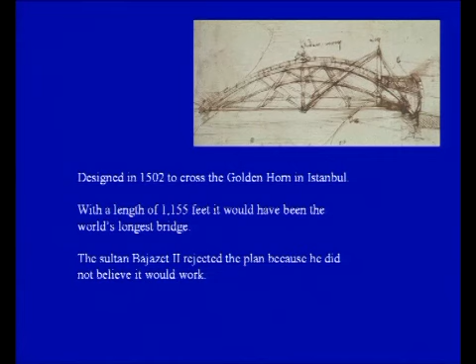Anyway, since I'm coming back from Italy, I thought this is the first lecture in the morning, and I thought that probably it's nice just to wake up in a different way. And my talk is about modeling.

Being about modeling, we do think that modeling is something we do just nowadays, but actually people were doing modeling long time ago too, and of course, being Italian, I'm very fond of Leonardo. That's the model of a bridge that Leonardo tried to convince the Sultan to build on the Golden Horn in Istanbul.

However, there is an analogy here. People never believe in models. The Sultan never believed in that model. The bridge was never actually built.

However, only recently, an architect in Norway saw the model of Leonardo and tried to build it. This is what the bridge looks like today. It works perfectly, without any experimental validation.

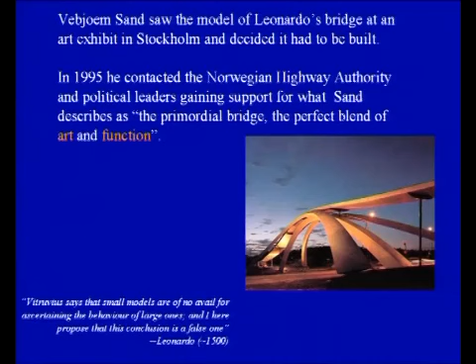So I think there is good hope that the models we do can probably work. Leonardo, I think, realized that small models sometimes can work, and they are really the ones we should look at before we actually model the big system.

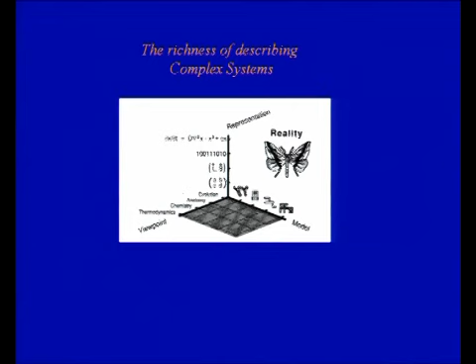This is just a little bit of introduction to say that what I want to do is describe a very complex system, and what I'm trying to do is represent it through a model. There are different viewpoints, and today I'm going to show you just one of the viewpoints, the way I do some kind of modeling. It's not unique, not the only way to solve the problem, but it's a way to do some investigations.

Now, to give you a little bit of background and go finally into the topic of the talk, granular materials. Well, granular materials, we all know that might behave in very different ways, and it depends really on what kind of flow they undergo. They can undergo slow flow, and the particles in this kind of regime are really undergoing non-impulsive and finite contact interactions. This is the regime where usually we use what is called frictional laws, and we take these laws usually from Coulomb.

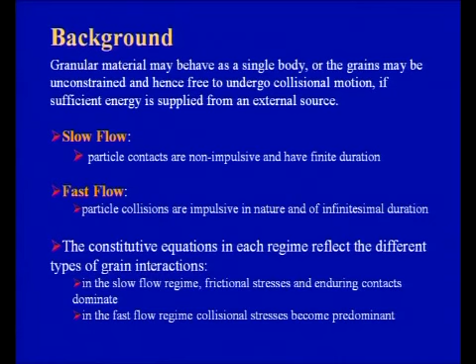Fast flow is the other extreme, where the particles really move very fast. They are very agitated, they can collide with each other, they can move around freely. Usually we assume that the contact between particles is of infinitesimal duration. When we try to model the two regimes, we use constitutive equations, and the constitutive equations have to take into account what really is the kind of interactions between particles.

As I said, in the slow regime, we have frictional stresses. Usually, in the fast flow regime, we have kinetic and collisional stresses.

The challenge here is really to develop the methodology and approach, and there is not a unique way of doing that, but we use the volume average continuity and momentum equations, also called the two fluid models.

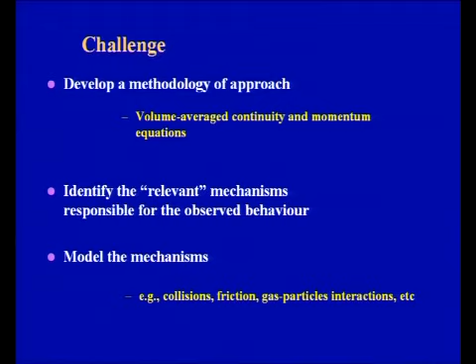We have to identify what are the relevant mechanisms which are responsible for the behavior, and we have to model the mechanisms, including collisions, frictions, gas-particle interactions, and sometimes cohesion, and so on. We have spent quite a lot of time identifying what are the real mechanisms we should consider.

I think there is still a long way to go, because there are still many investigations that need to be done, probably at the particle level, which can give us a much better understanding of what really is happening among particles.

Telling you just a little bit the way we solve the problem, we do assume what is called continuum modeling. These are the particles. I don't think I need to go into much detail, because my audience today is of experts, and that is really very nice.

But anyway, just briefly to review the way we do the modeling: these are the particles which are in a duct, for instance in a tube or whatever, and the particles are considered to be like a collection. All the collection of particles are considered to be a continuum.

This is why we can actually write momentum balance for what we call the particulate phase. And the two phases, the gas and the solid phase, are considered as two interpenetrating continua.

I think that overall, this is the important step, and this is where we have concentrated a lot in the last years, writing down the constitutive equations.

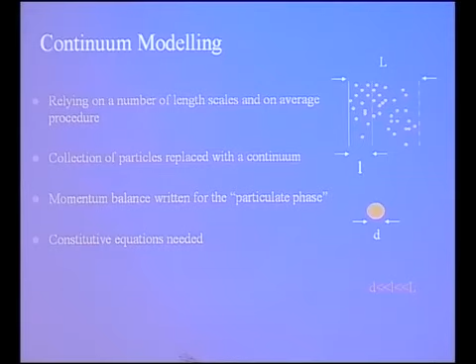The other thing I forgot to say is that in order for this kind of modeling to be valid, there are many questions, because there are people who don't believe in this kind of modeling. I think the most important thing is that we have to make sure we are dealing with a system such that all the length scales are taken into the right consideration.

In other words, we make averages on a volume, a control volume, which does contain enough particles. Because if we go to the scale of the particle length, we lose the possibility to make this kind of averages.

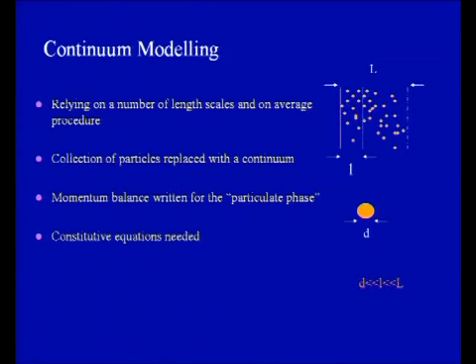One of the major problems is just to write the boundary conditions, because saying 'at the wall' doesn't mean anything. You really need to consider a zone which is very close to the wall, but still contains a significant number of particles.

I'm not going to go into much detail through the equations at this level, because I would like to concentrate on one of the issues we encounter during this kind of work. What I've done so far is present you the two limits, the slow and the very fast flow, and now I'm going to present the equations.

These are limits, but there are situations in between that, up to some time ago, we weren't able to model. We hope we have tried to model it in a more realistic way, but probably this is not over yet.

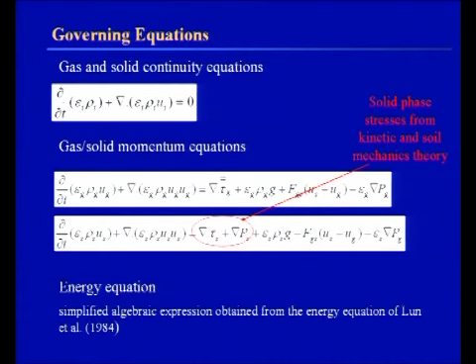We have to write governing equations, and this is the continuity equation, written for the gas and the solid. The index here just indicates the two phases. Epsilon is the solid volume fraction.

Density, velocity, and here the gas and momentum equations, the gas-solid momentum equations. Again, these are for the gas and this is for the solid. As you can see, all very well known terms.

You can see the stress here for the gas, which doesn't usually give any problem, and you can see the stress here for the solid. The big problems arise when you try to write constitutive equations to close the balance equations for the stress here. Again, this is the drag force.

Everything probably can be written in a sort of straightforward way. However, when we try to express these two terms in terms of the characteristic of the system and what the behavior of the system is, the real problems start to arise.

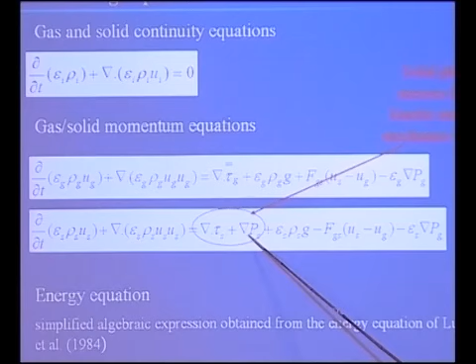I put this here, I don't spend much time on the details of the equations. I didn't write down the energy equation, which has to be supplied to these equations, to the momentum and continuity equations, only because when we try to express these two terms here, and some other bulk properties of the gas and the solid, we do need to introduce what we call granular temperature.

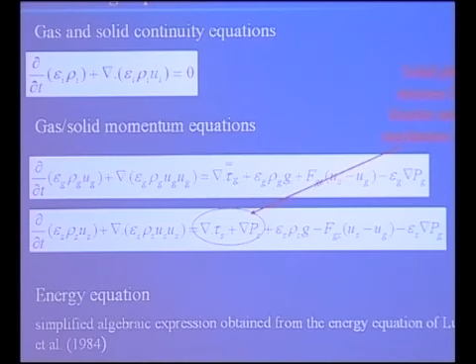I'm careful now, I don't call it pseudo temperature anymore because people don't like it so much. But anyway, granular temperature, which is nothing else than a measure of the fluctuation velocity of particles.

Now, as we said, there are situations where particles can be very close to each other, the flow can be very dense, and therefore we need to take into account the fact that there are some frictional stresses, which are the dominant ones. There are situations where the flow is very dilute, so probably the kinetic and collisional models can be okay.

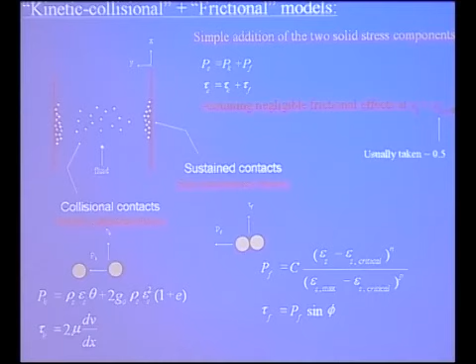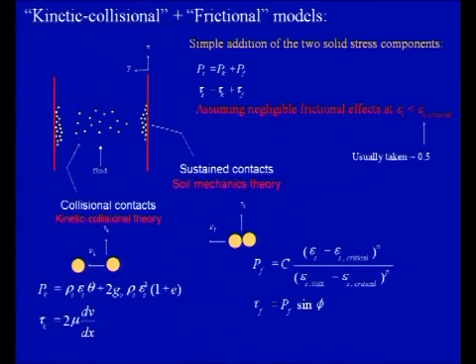However, you do realize, and this is the first problem that we started to have a really long time ago, these kinetic collisional plus frictional models, which is called also the additive model, dates back to a very long time ago. My PhD thesis last century was on this one. Yes, it was on this kind of approach, and that's exactly what I did.

I just put the two contributions together in a very simple way, actually.

And what we were saying at that time was, well, if there will be a critical value of the solid volume fraction, if that critical value is exceeded, therefore you do switch to the other regime. So it was not really any kind of modeling of the intermediate flow, you just say this is the flag. Under this value, you have kinetic collisional flow. When you reach this value, then you switch to the frictional flow.

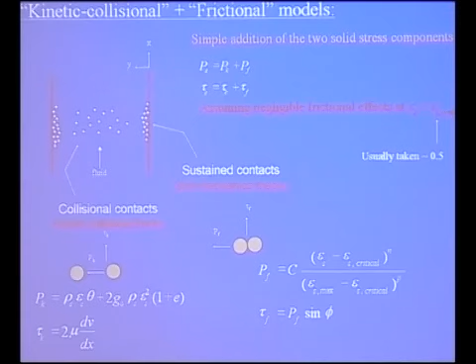And here, of course, this theory was developed in 1984 I think, and this is really from the soil mechanics theories, and these are the classic equations. There are many derivations, but usually we refer to Lun and co-workers in 1984 I think.

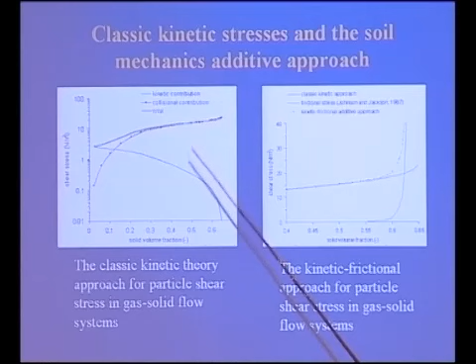Now, as I said, collisional, as the word says, is just the stress which arises from the collisions between particles, binary collisions between couples of particles. The kinetic stress is the one which arises because particles are moving around, bringing their own kinetic energy with them. So it doesn't involve directly the collision.

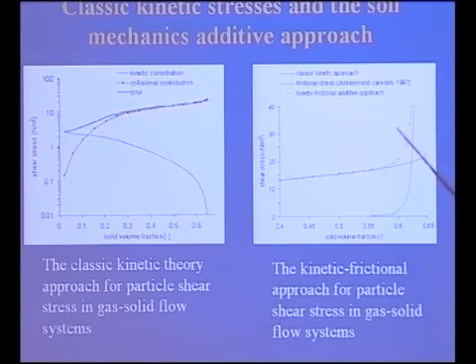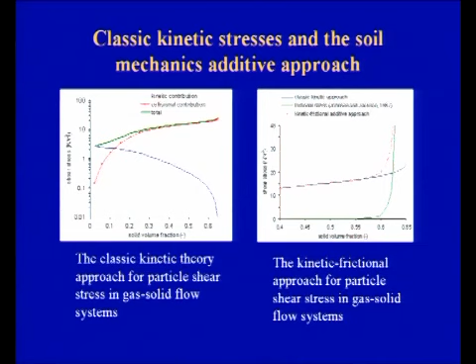Here we have plotted the shear stress versus the solid volume fraction. When we put them together, this is the kinetic frictional additive approach. This is just the frictional, and this is the kinetic. As you can see, the additive approach takes a switch at about, well, it depends. Some authors take 0.5, some 0.55, 0.59, and so on. So it's really in this area that we have a sort of flag where we just tell the program, well, go to the other way of calculating the stresses.

Intermediate regimes. Now, we looked at that data, we did a number of calculations. This is not just the thing that we calculated, of course we calculated the velocities, we did the flow maps and everything. However, I think there was a clear indication that something was going on between the two flows.

And actually, it's the reason why we started to realize that it was not really good for the kind of flow that I will speak about today, which is really the horizontal flow. But it was, and my co-author is in the audience, this work is really very much the work that Yassir over there did when he was at Heriot-Watt.

We started to investigate fluidized beds, and we had some strange situations around the bubbles. We started to try to understand what was going on. And there was this region where the flow is not very dilute, the particles are not very dilute and not so dense. And this is why we started to think, well, probably there is an intermediate regime there.

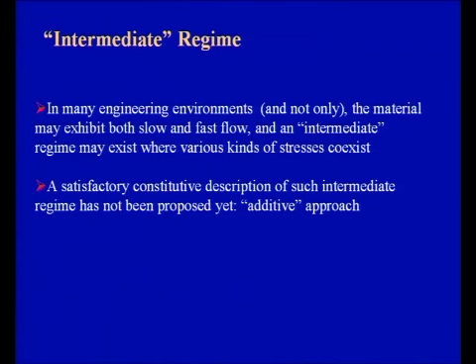I remember we went to an IFPRI meeting in Germany, and we were discussing - Ricky was there and Roger was there - this intermediate regime. We're aware that the slow and fast regimes are very ideal situations, which we've idealized in our mind. But of course something exists in between. The additive approach isn't really modeling what is in between the two regimes - it's a way of cheating, I suppose.

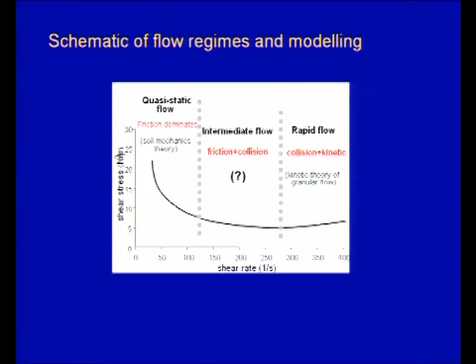This diagram, redone here, summarizes a little bit what I was trying to say. As you can see, there is quite a big zone here where we really should consider the intermediate flow, and we don't know very well how to model it.

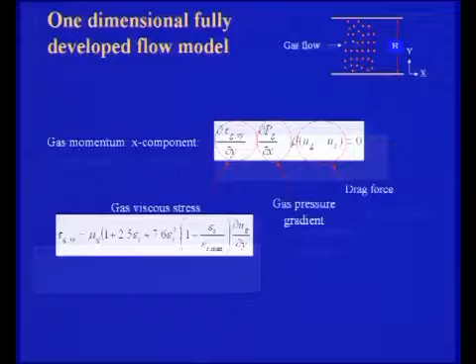In order to address the intermediate flow, we started to think of doing our calculations on a one-dimensional, fully developed flow model in the horizontal duct. The reason we decided on the horizontal one is that it's a very nice way of investigating the intermediate regime, because close to this wall here, you have very dense flow, at the top you have very dilute flow, and there are all situations in between that you can think, well, this is probably intermediate flow.

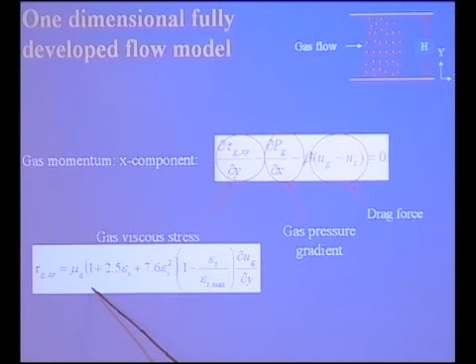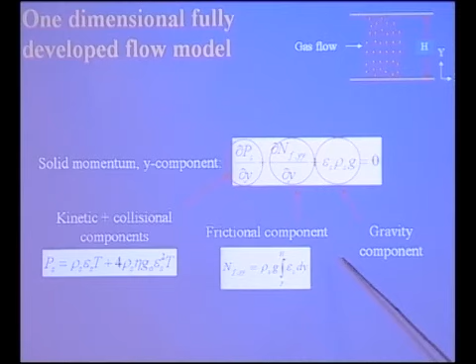So again, we wrote the usual equations for the two phases. This is the gas - we use the expression for the gas, which is modified for the presence of particles there. This is the y component of the solid momentum for the gas, with two contributions now: kinetic collisions and the frictional, and this is the gravity.

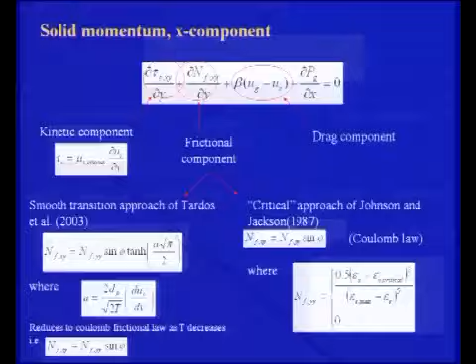Again, it seems like written in this way - still, we have the kinetic and the collisional ones in this additive way. Solid x momentum - now here it comes, it's a very busy slide. Let's try to see what I'm trying to say here. This is the kinetic component of the solid momentum, this is the frictional component.

Now here there are different kinds of approaches. There's the critical approach, originally done by Johnson and Jackson, and as I said, I use exactly the same methodology in this kind of problems - this is really the Coulomb law.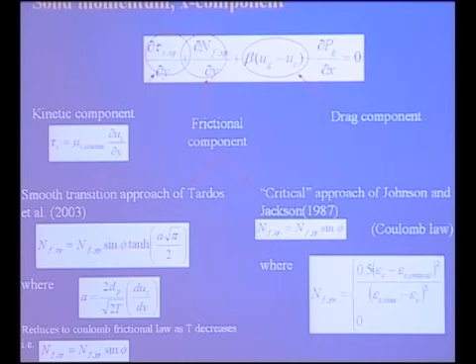Tardos in 2003 developed a new way of approaching this frictional component, and as you can see here, there is a new way of relating the frictional stress to the pseudo temperature. The good thing about this methodology is that now you have A, which can change when the pseudo temperature or granular temperature changes, and this equation only in the limit when this goes to infinity recovers the Coulomb law - you recover the right limit.

So just keep in mind that expression for the time being. And then the kinetic energy balance - as I said, we need to write this because we have that T that we need to express. We have the additional unknown T, so this is why we need an additional equation.

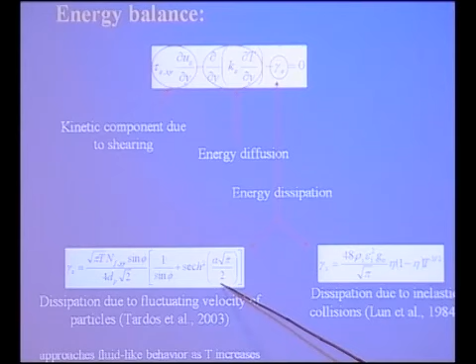There are again two ways of writing the energy dissipation now. This is the original one, which comes from the kinetic collisional model. This is the one which comes when you use the Tardos approach, and again you can see there is a contribution which is more or less important depending on the values of A. This energy dissipation, I should say, is a way of saying that particle-particle interactions are not perfectly elastic - in other words, there is a loss of energy when particles collide with each other.

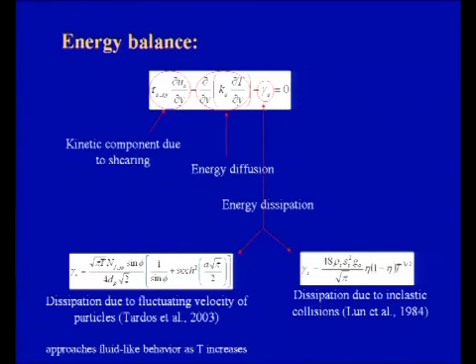This is why, in the Lun approach, there is just the kinetic collisional theory which is invoked. And here there is something else, because it considers also the fact that there might be situations where you are in between.

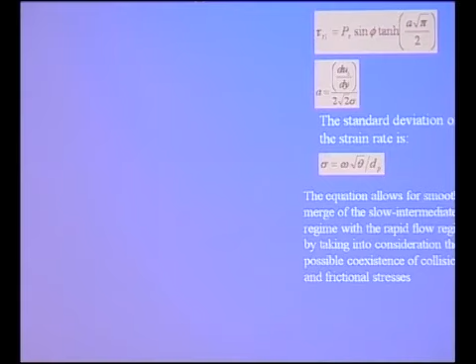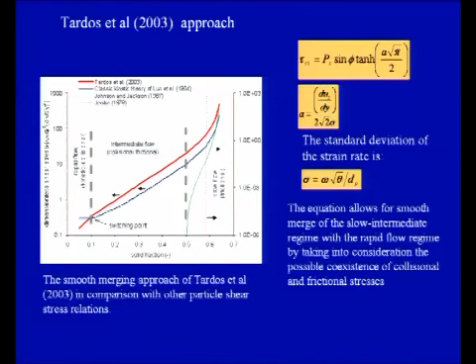Again, I want to just show you this is the Tardos expression, written for one-dimensional flow for the kind of geometry we are considering. Now we have theta here instead of T because we make the system dimensionless. But anyway, what I want to say here is that by varying the standard deviation of the strain rate, you can vary the contribution to the stress here.

Calculations that we have done - red is the equation I have just shown to you. This is the classic kinetic theory. This is Johnson and Jackson, and this is Jenike. We were just considering different kinds of theories and trying to see what the contributions of the different theories were.

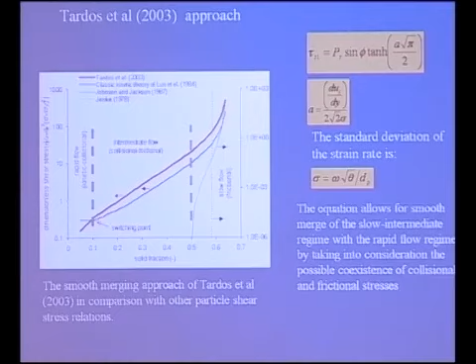And then just to see how the particle shear stress compares to each other. As you can see, we identified zones here where actually the two expressions - the kinetic collisional expression and the one from Tardos - are not really giving the same kind of values.

Next, we defined the transition regime, just to give some guidelines on when we start going from one regime to the other. As you can read here, we say we are in the intermediate dense regime when, calculating the two stresses - from the kinetic theory and from Tardos - the stress calculated by Tardos exceeds the kinetic model.

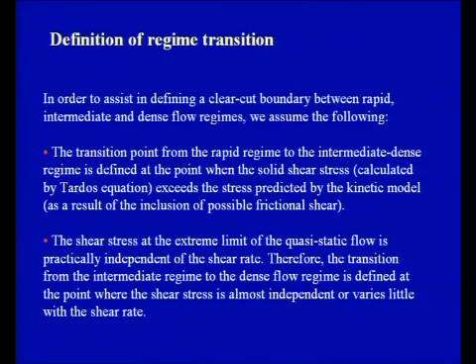And it does exceed because there is the additional contribution due to the frictional stress there. We do say we are in the quasi-static regime where we don't observe any dependence on the shear rate anymore. So in a certain way, we have the extreme where we are really in the slow regime and switching to the other one.

Now, this is what I meant. Here is the switching point. This is the classic kinetics. This is Tardos - the expression of Tardos when you write it for a very general geometry.

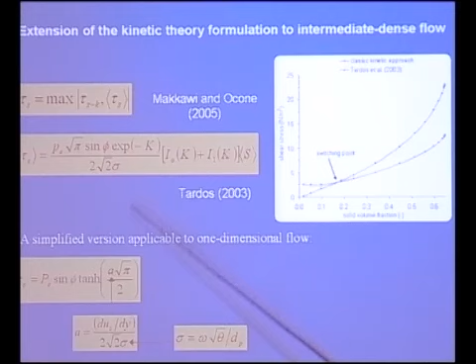What we did with Yassi, we assumed in our model that when we calculate the switching point, we take the maximum between the kinetics one or the Tardos one. Again, this is just the simplified version I presented before for the Tardos approach.

Here, just a comparison again with the other theories, and this is where we switch to the intermediate flow. This is what we consider being the limit for the intermediate flow.

We calculated the flow operational map for horizontal flow, and as you can see, quite different results come out from the different theories. This is the frictional additive approach, the classical kinetics model - as you can see up to here, you have to really zoom in. There isn't really any difference if you consider the additive of the collisional only, because the limit where things are happening is so small, the region where things are happening is just here.

This is the smooth transition through Tardos, and this is what we have with another approach, very similar again to the additive approach. So it's just a comparison between the different approaches.

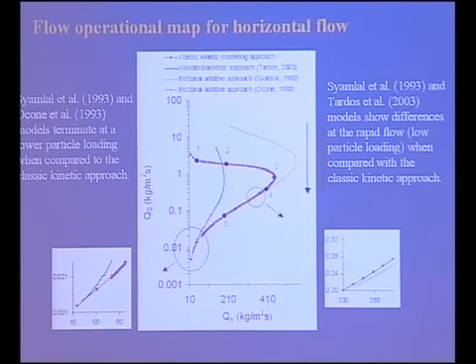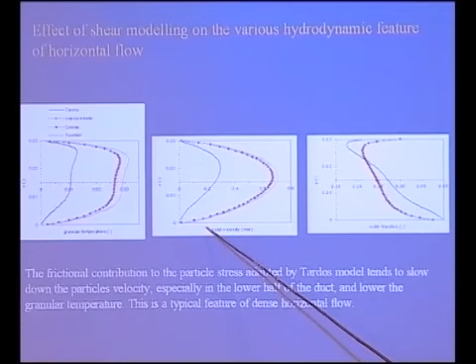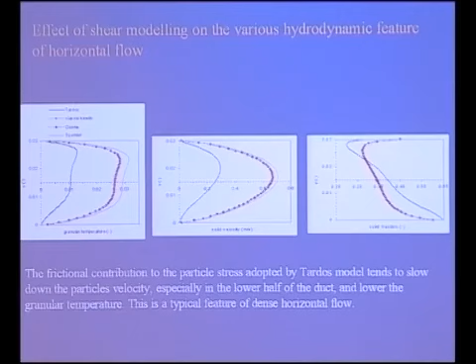You can see that with just the additive approach, you have this kind of behavior. If you now consider the new approach that we modified into the model with Tardos's equation, you have this other behavior here. This is the solid velocity, and this is the solid fraction - I think this is probably the most interesting one, because here you can see there is no such unrealistic behavior close to the upper wall, despite the boundary condition staying the same. So this is what we obtain for the new model.

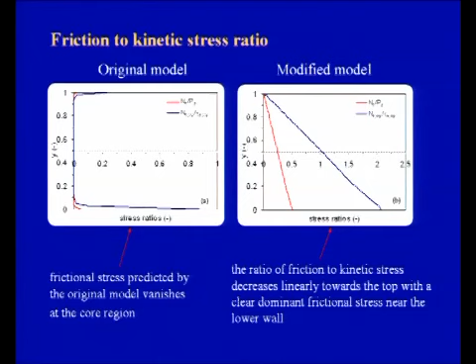We also did some calculations on the stress - this is the friction to kinetic stress ratio. This is what you obtain if you consider the original way of adding the contributions. Here is what you obtain with the modified model, and you can see it's a very difficult zone which we should enlarge, but as you expect, it goes gradually from very dense to dilute, and therefore it's a much better way of representing reality. This area was a little bit tricky for our calculations before.

We presented a couple of papers, and one was accepted with no changes, which we were quite amazed by. Another one came back saying we had to do some experiments. We didn't have any experiments, so we went back and tried to look at what was available, and tried some kind of comparison with experiments.

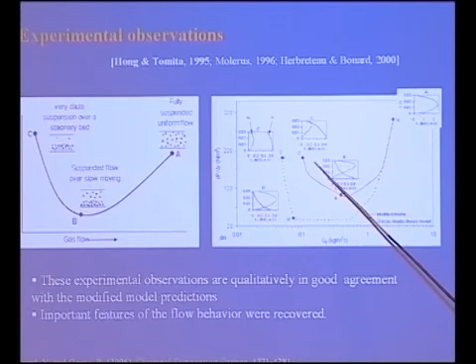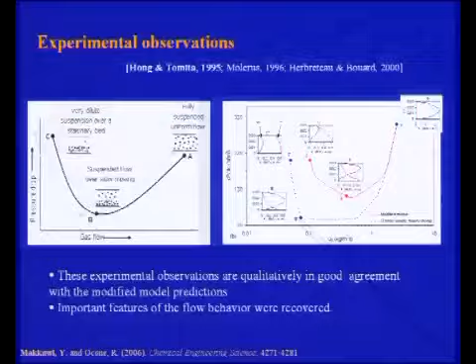We found some papers, and tried qualitatively to draw what we had from those papers, and tried to reproduce the same kind of behavior, the same kind of diagram, for our situations. As you can see here, this is the modified model, the red one, and this is the classic kinetic theory. We tried also to plot the velocities, the stresses.

I think it's this one, and the solid - I can't read it myself. No, I think this is again the stresses, yes. But what I'm trying to say here is that our model was much closer to the values that we found in these papers.

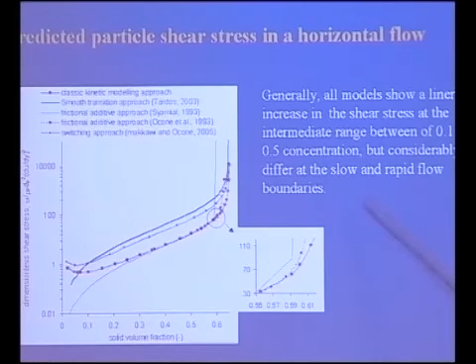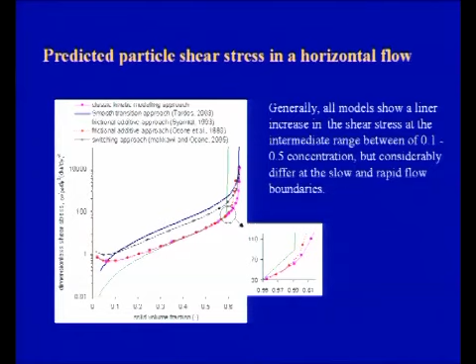The predicted shear stress in horizontal flow, again here it's another way of looking at the different models together. We did that to see when we were switching to the other regime, and the intermediate range was quite large. It's not just a small region, but a very large one, and we think it's between 0.1 and 0.5.

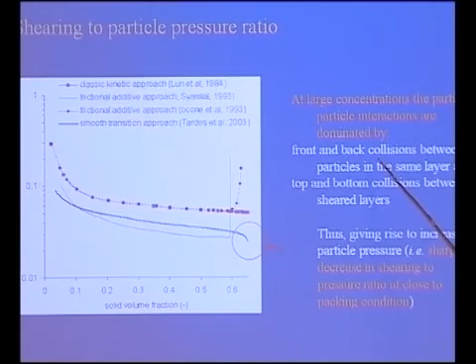We also plotted the shear to particle pressure here. We had some strange results in this limit, which would be nice to discuss with you, because we thought this is the explanation. We observe with this modified model this sort of behavior, with very large concentrations.

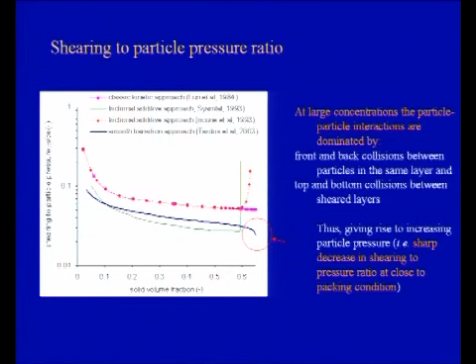This is the kind of explanation that we tried, saying that at very large concentrations, there are front and back collisions between particles within the same layers and the top layers, which gives rise to an increase in particle pressure, and therefore a sharp decrease in the pressure ratio at close packing conditions. So this area was a little bit tricky.

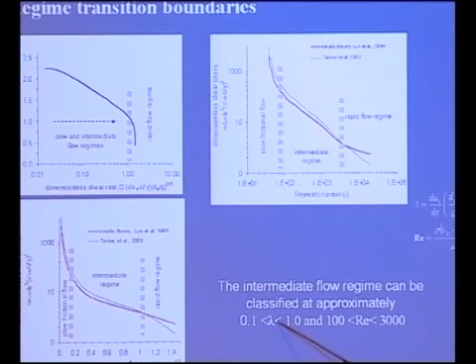Finally, we tried to put together everything we had, because we thought that when you want to apply your theory, you have to give some guidelines. So we tried to plot what we had obtained for the different regimes, and extract, in terms of a modified Reynolds number with relative velocity instead of gas velocity, and in terms of the dimensionless shear rate, what the limits are where we should start to consider the intermediate regime.

What we found is that the dimensionless shear rate should be in this limit, and the modified Reynolds number should be in that limit. So it's a way of concluding, saying these are the conclusions from our calculations, which we believe are a good guideline for what we have observed so far. The conclusions are exactly what I said a few minutes ago.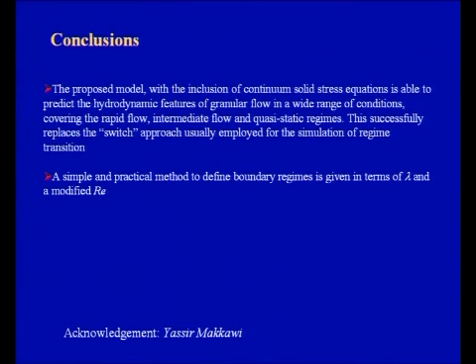Two things very quickly. First, but very important, acknowledgement to Yassir, who is over there, and as I said, he did most of the calculations.

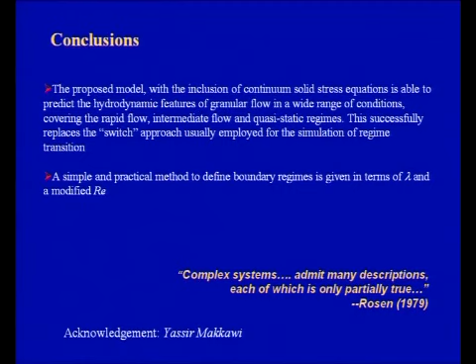Finally, I would like to leave you with this, going back again to complex systems, where we know there are many descriptions, and we don't know which one is the real one, except when we do experiments, which we haven't done. Thank you very much for your attention, and I'm on time.